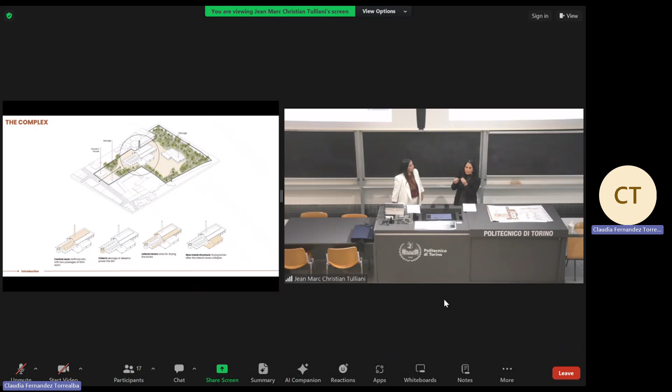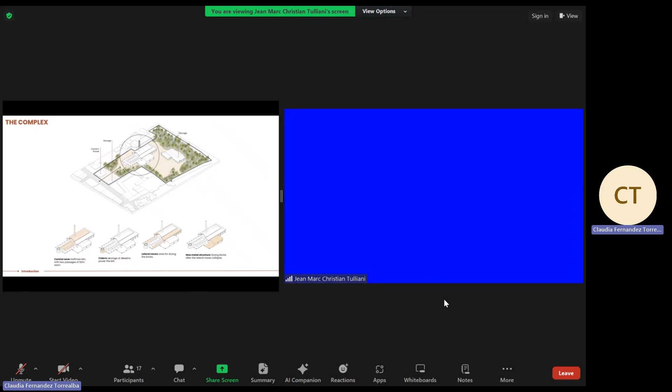The owner still lives on the site and owns the whole area. The fornace, the industry, is composed of the main nave that has the Hoffmann kiln where the bricks are produced. Then he added a cistern where he stored all the fuel to produce these bricks, and the lateral nave and the extra structure on the side to dry the bricks.

Now we want you to imagine entering the Fornace Gaiero in its golden era, filled with life and production, where the Hoffmann kiln is still fired, and every piece of the building was useful. Now it's a whole abandoned space, destroyed, with many unused spaces, and just a small part used for production. This is what we want to change.

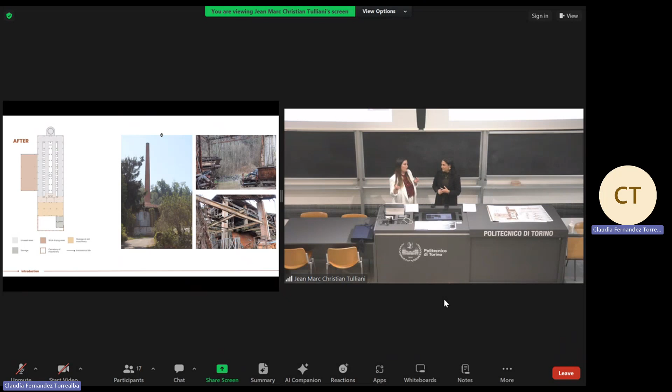So we asked ourselves: how can the adaptive reuse of Fornace Gaiero be strategically planned to preserve historical significance while reviving the essence of Dogliani and the region's cultural identity?

We started to value the physical elements of the site, the Hoffmann kiln, and the bricks, because they play an important role in Italy's construction industry due to its economic development and mass production. Thanks to the Hoffmann kiln, production continued and granted efficiency and good bricks.

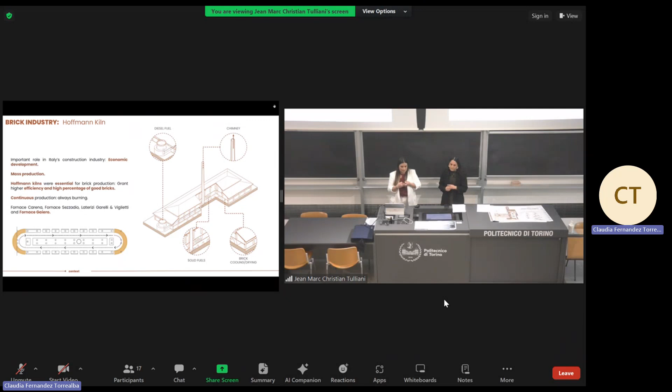We identified three other fornaci in Piemonte with similar characteristics to Fornace Gaiero: Fornace Carena, Fornace Sezzadio, and Laterizi Garelli e Vigiletti.

Another thing we want to value is that Dogliani is located in the hills of Langhe, Roero, and Monferrato, which are part of the UNESCO World Heritage List. But if you look at this map, Dogliani is actually outside of the buffer area. So even though it has similarities in the landscape, it's not part of this preservation list.

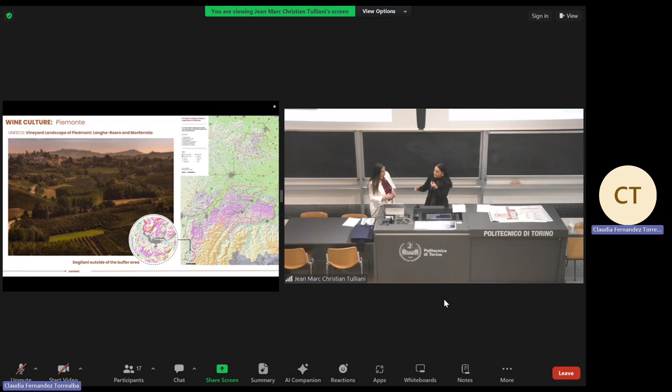But Dogliani has a treasure: the dolcetto, a grape that's very hard to produce. Because it's hard to produce, people don't really know it, and it has lost a lot of popularity, because when you talk about wine in Piemonte, you normally hear about Barolo and Barbaresco, but Dolcetto isn't the most recognized. Right now, producers want to enhance this identity and essence and make it visible again.

Apart from the wine culture, we highlighted Dogliani's architectural identity. Giovanni Battista Schellino was the architect of Dogliani and had a great impact on the town's aesthetic. One vision of the town was to use local handcrafted bricks produced in Fornace Gaiero, and his eclectic style distinguished Dogliani among other towns in Langhe. But Dogliani is also filled with life and events.

So we analyzed all the events throughout the year and where they took place, and if they were developed indoor or in outdoor spaces. The majority are developed in public squares or points of interest within Dogliani, but most of them are not suitable for different types of events and activities.

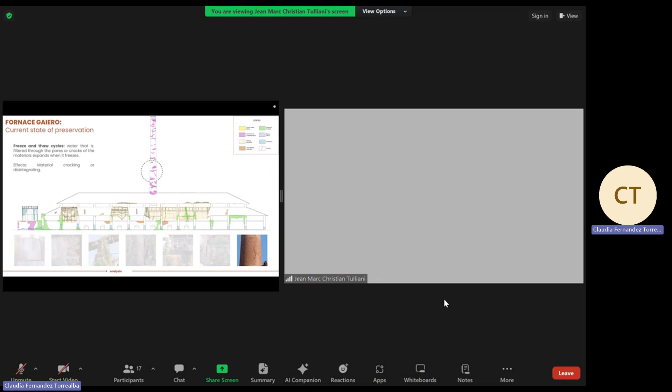The materials he used were not compatible with the original ones, and they caused delamination and cracks, among others. Also, freeze and thaw cycles affected the chimney, because the water that enters the porous material freezes and creates pressure and expansion.

These problems we also saw in some case studies that we researched. The first one is called Pudong Hoffman, located in China. The adaptive reuse they made actually created an open area and connectivity inside to host a restaurant.

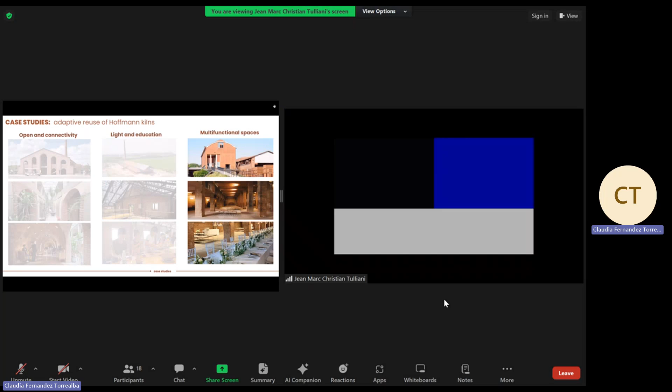The third one, which we mentioned earlier, is Fornace Carena, located in Piemonte. Right now it still produces bricks, but it's also a multi-functional space where they have a museum, and in the same space they also host events.

With these three elements, we wanted to go back and understand the bridge between bricks and wine. This would be the earth itself, la terra. From the earth comes the metamorphosis of the bricks and the wine, and this transformation is what we want to happen with Dogliani and Fornace Gaiero, to preserve the identity and the essence.

So our concept is the revitalization and regeneration of Dogliani and Fornace Gaiero. We have three aims: the first, architectural, is to preserve and revitalize the industrial heritage of Fornace Gaiero. The second, social and economic, is to boost Dogliani's tourism by integrating the Dolcetto wine and the architecture of Schellino. The third, historical, is to preserve the tradition of the brick-making process and highlight the tradition of wine culture.

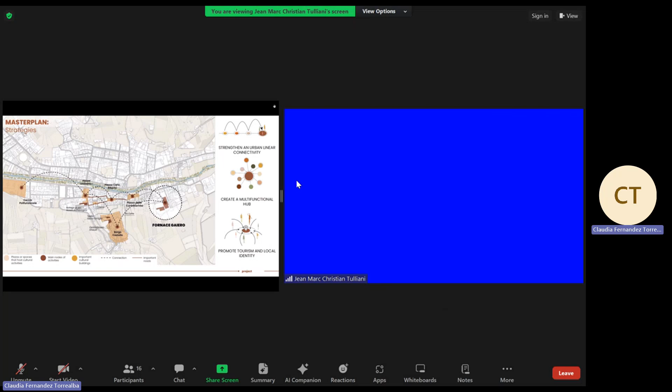After the analysis, we created three strategies for the project. The first is to strengthen urban linear connectivity, joining the spaces in Dogliani, public squares and buildings where markets and events are hosted, with Fornace Gaiero adapting its spaces to bring back cultural identity. The second is to create a multifunctional hub that complements other spaces and relocates different cultural activities for economical growth and cultural vibrancy. The third is to promote tourism and local identity.

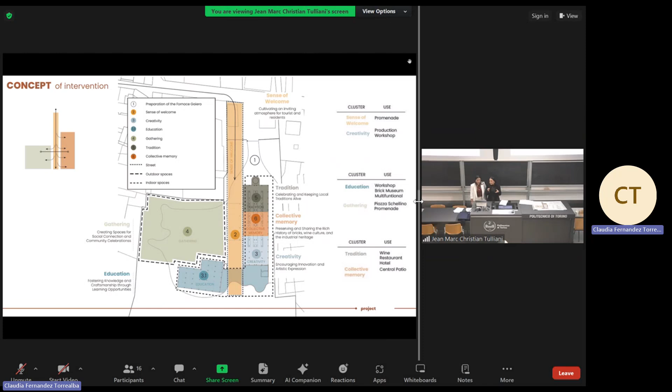During this analysis, we identified three types of spaces: the streets, where events are also hosted, the indoor spaces, and the outdoor spaces. To adapt this to our site, we created six clusters connected to the values of Dogliani: gathering, education, tradition, collective memory, and creativity. These clusters relate to the use and the phases of construction of our project.

The initial phases are the preparation of the fornace itself. The first is site cleaning, exterior demolitions, ensuring building stability, and enclosure of the private area of the owner, and construction of the promenade.

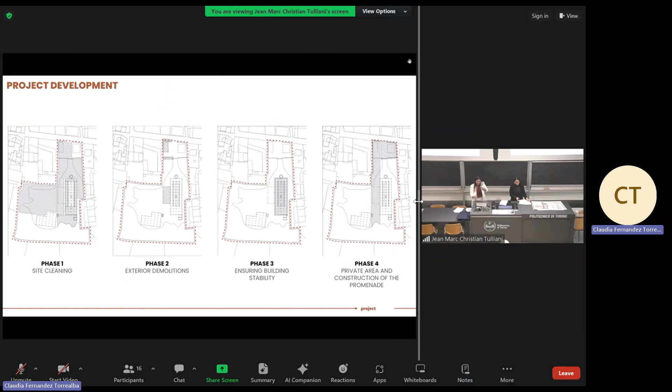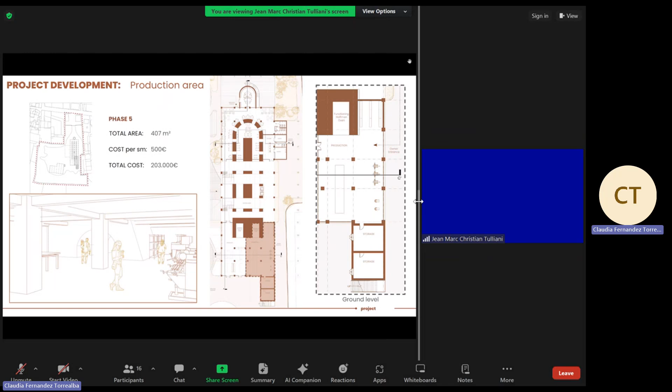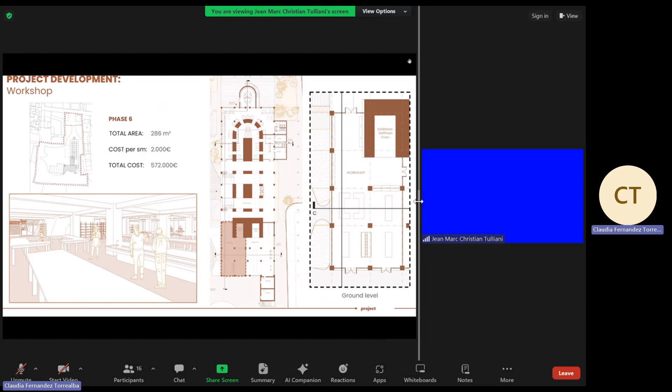As we are considering a multifunctional space, the next phases relate to each use. The first is production, since the owner still produces, and this was the most important part to highlight. The second is the workshop related to the bricks, offering a different cultural experience while the owner shares his knowledge and passion for the bricks.

To highlight the wine and gastronomy of the place, we're proposing a restaurant that also has a wine tasting experience area. We also wanted to highlight the architecture of the Hoffmann kiln with its round shapes inside the vaults.

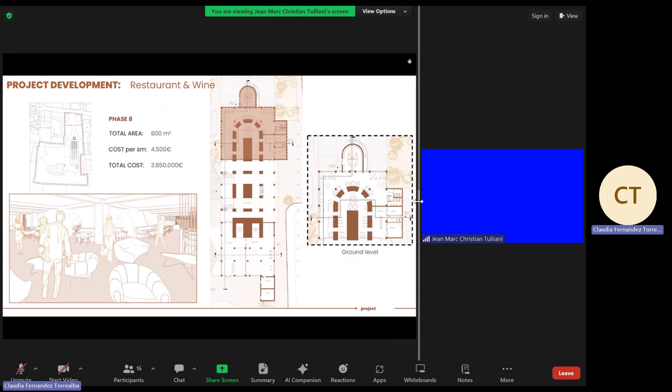We are also proposing a brick museum, since the owner has a lot of bricks that he and his family have produced throughout the years, and we wanted to exhibit this.

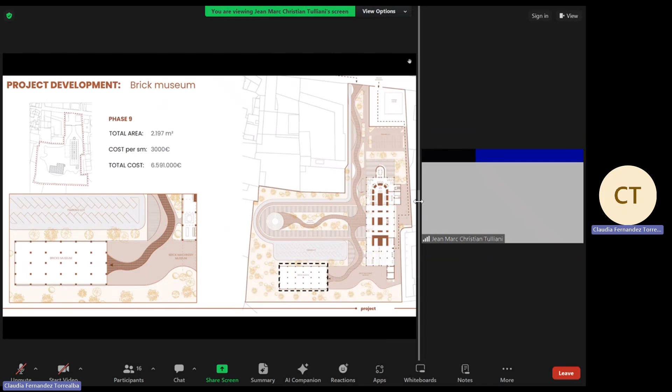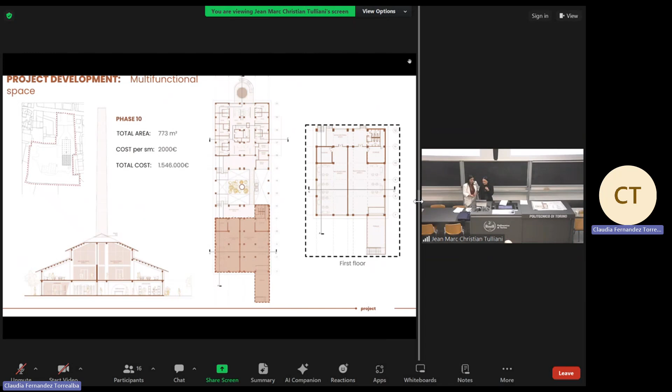Finally, in the upper part of the building, we are also proposing a multifunctional space with double height, so it can host activities from the town within the building.

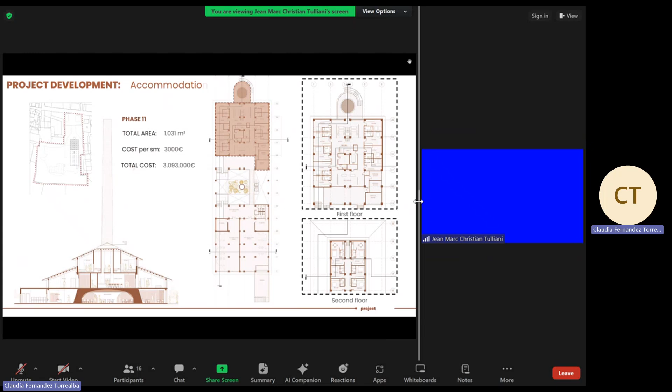In terms of accommodation, we are proposing a hotel distributed in two levels, responding to the need for accommodation within the city that offers different experiences.

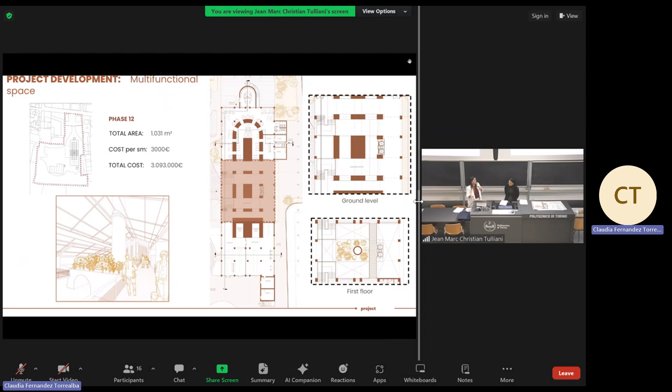But right now, the question is, how much will all this cost? Of course it's a huge project, so we look for stakeholders, both public and private. Among the public ones are Bandi programs and many other funds, and the private ones are mainly related to wine and accommodation or hotels.

This is important to us to make the project possible, because the most important thing is to make Dogliani a whole, with Fornace Gaiero as an anchor to continue this linearity, and make people get to know Fornace Gaiero, their spaces, their town. Another important thing for us is to adapt and reuse these spaces, since right now there are many in Italy and around the world left to decay, deteriorate, and be forgotten. This is also the future of architecture: adapting these spaces for the necessities of people right now.

Right now, if you want to know more about the project, here are the plans of our design, so you can come and see it. Thank you for your attention.